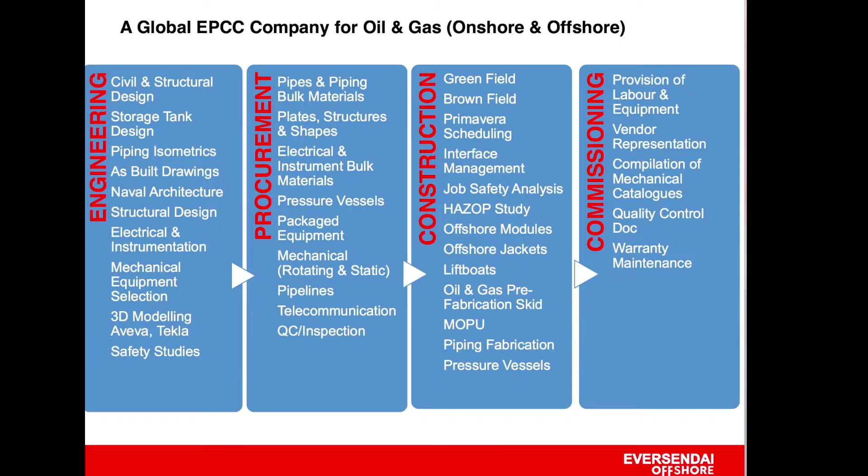What we do as EVERSENDAI Offshore: we endeavor to do refurbishments, modifications of rigs, conversion to MOPUs, onshore and offshore modules, FPSO topsides, new build jack-up rigs, and of course jack-up lift boats, etc. We offer engineering, procurement, construction, and commissioning services to the oil and gas industry, and those are the areas we can help the industry with. We have quite a few facilities.

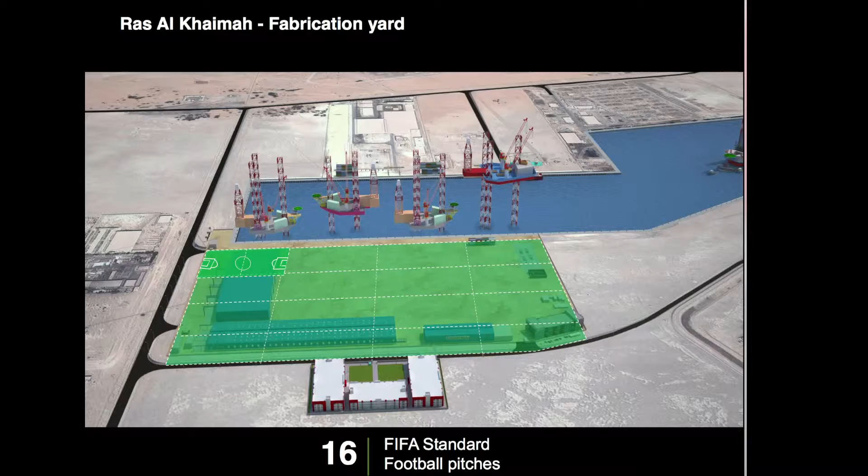The main facility is in Hamria, Ras Al Khaimah, whereas there are smaller facilities in Dubai and several other places in the world, including Malaysia. The Ras Al Khaimah yard is quite big - about the size of 16 FIFA pitches, about 200,000 square meters, with about 550 meters of quayside, where we can load out anywhere along the quayside.

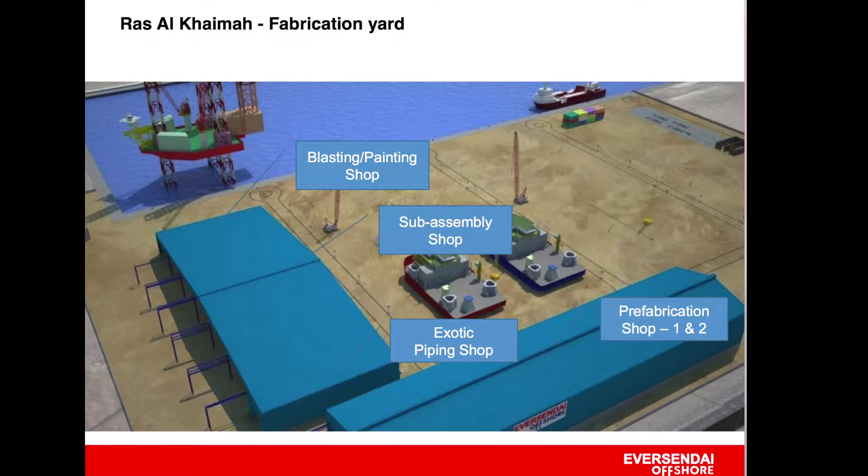That's a general view of the yard in 3D. We have blasting, painting shop, sub-assemblies, exotic pipe shop, and you can see the vast yard for assembly.

I now want to move on to the actual topic itself. We are building these lift boats for Vahana Offshore, and it is a Gusto design. These two vessels are called Aryan and Arjun. They are classed to DNVGL.

The notation would be 1A1 self-elevating offshore support unit, self-propelled E0, DPS2, helideck and crane. Its flag country is Singapore. That's the main characteristics of the vessel.

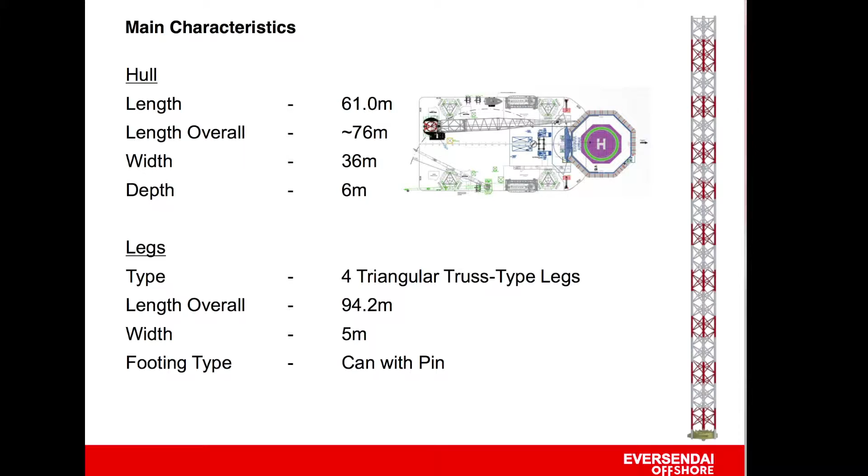It's got a length of 61 meters, width of 36 meters, and a depth of 6 meters, with an overall length of 76 meters. The footing is a can with pin type with 5 meters width across.

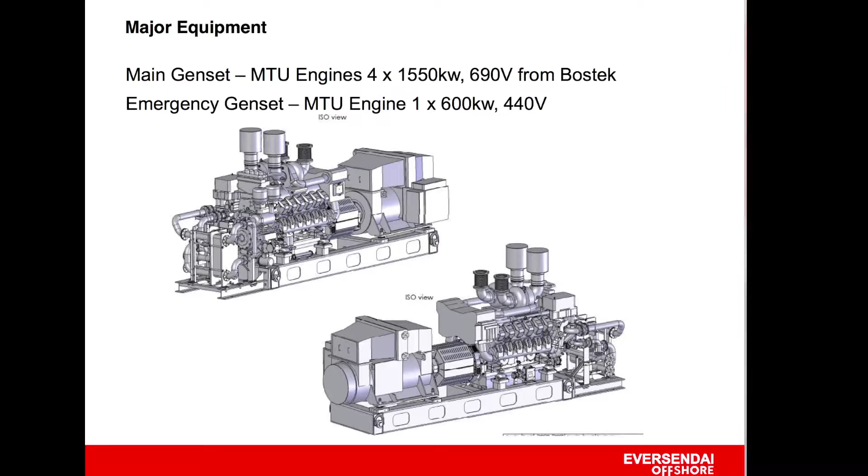The main power units, which are gensets, come from Bostek, an MTU engine coupled with an alternator of 1550 kilowatts for the main engines and 600 kilowatts for the emergency gensets.

It's a water-cooled engine. The main thrusters come from Schottel, 1200 kilowatts, which can propel the vessel to a minimum of 5 knots. This has been proven in the other vessels which have been built along with this. It's got 2 forward and 2 aft thrusters.

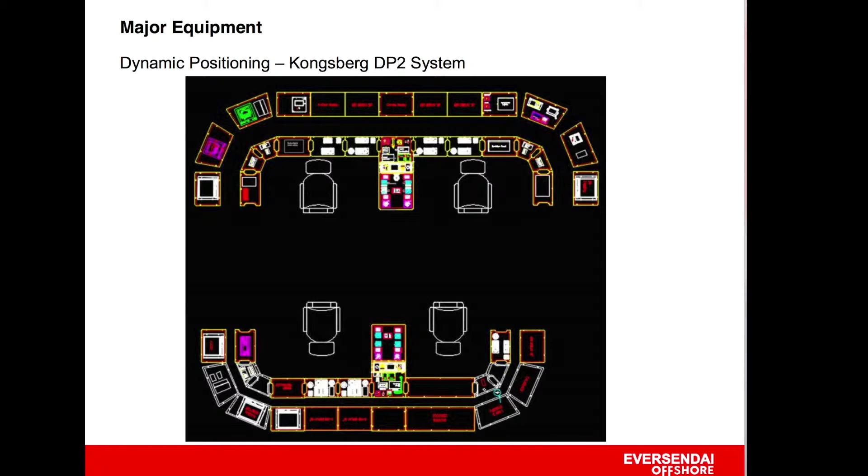The design is not unfamiliar to most people. The DP system, which is one of the critical things in the vessel, is coming from reputed Kongsberg systems, who are a leader in DP systems in the world.

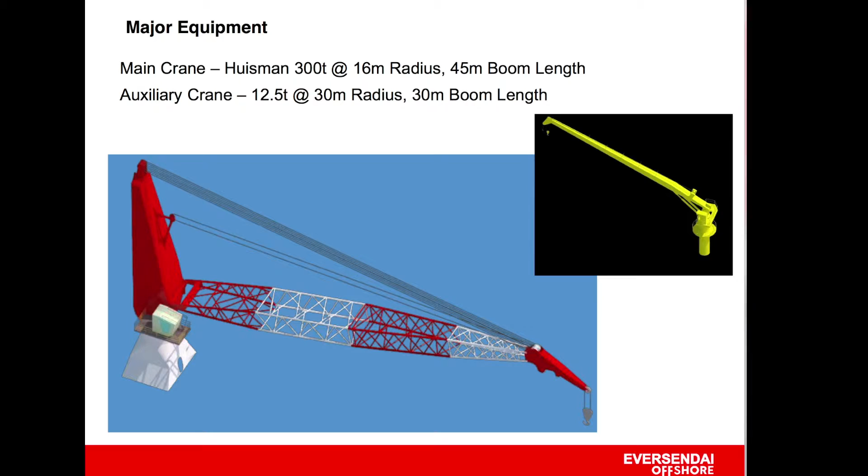The main crane, which is a 300-ton capacity crane with a 45-meter boom length, is from Huisman. The auxiliary crane is a 12.5-ton, 30-meter radius, 30-meter boom length crane, on the starboard side of the vessel.

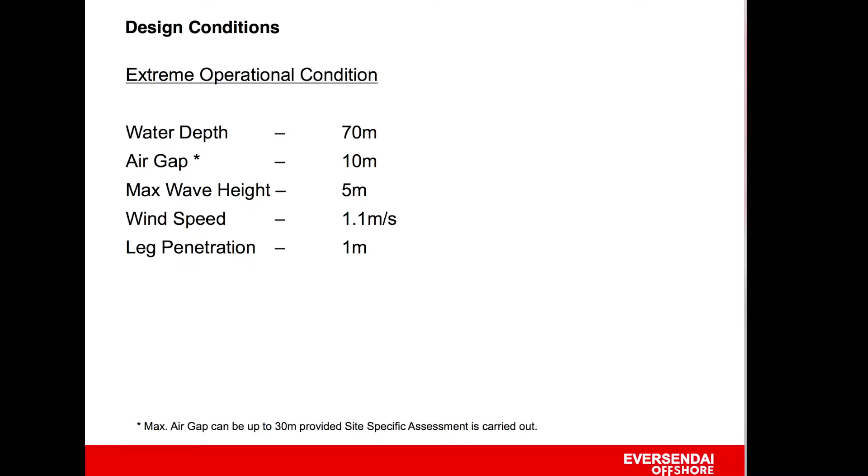Main design conditions: it can operate for survival at a water depth of 68.5 meters with an air gap of 7.5 meters, maximum wave height of 5 meters, wind speed of 1.5, and leg penetration of 1 meter. The extreme operating condition is at 70 meters, with an air gap of 10 meters, wave height of 5 meters, wind speed of 1.1 meters, and penetration of 1 meter.

During transit, it can hold a variable load of about 1,300 tons with a draft of 3.8 meters. The legs will be fully retracted, and the overall displacement will be about 7,300 tons. The maximum or minimum speed, as I said, is about 5 knots.

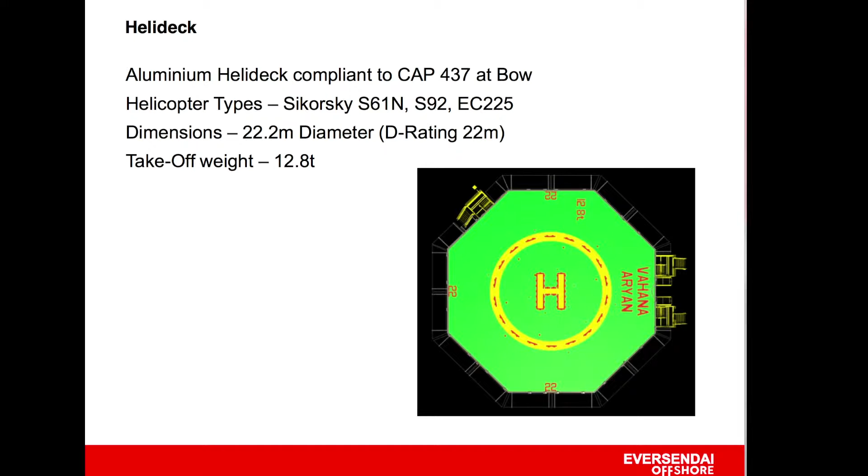The helideck is compliant to 2015 CAP 437. It can take helicopters Sikorsky S-61N, S92, and EC225. Takeoff weight is 12.8 tons.

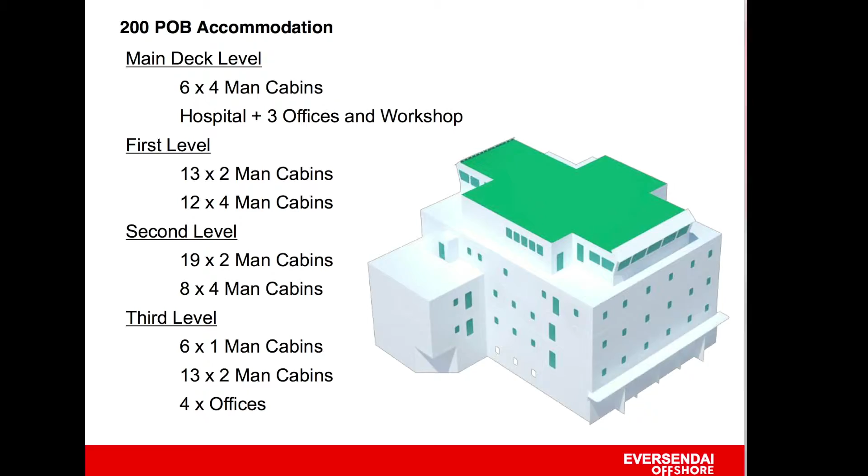The accommodation, initially designed for 150 POB, has been upgraded to 200 POB because we felt the market needed a 200 POB more than 150 POB to make the vessel more versatile. Those are the details of the levels. You'll find it could easily accommodate 200 POB without any problems.

We at EVERSENDAI are committed to quality, efficiency, and teamwork. Thank you very much.